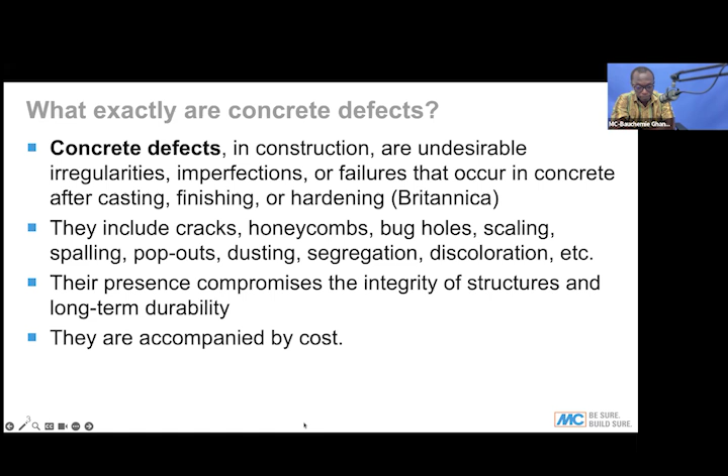Now we move to the common defects. Research has shown that most of the defects we have on our site or project are approximately 36% related to construction and supervision problems, about 26% design problems, and 21% an issue of exposure conditions like temperature, wind, and those kinds of things.

Like the form work for concreting, if the form works are not properly done, if you are casting concrete and it's not properly vibrated, or the mix designs are not properly mixed on site, you end up having too much water and bleeding in the concrete. All these things are defects that will result in other problems when you allow this to happen on site.

So the human resource on site and their capabilities and technical skills are key to construction, whether you achieve good concrete or end up with defects. This is a summary of research conducted around 1997, and this is true from experience. Most of the issues you meet on site are mostly related to supervision problems on site.

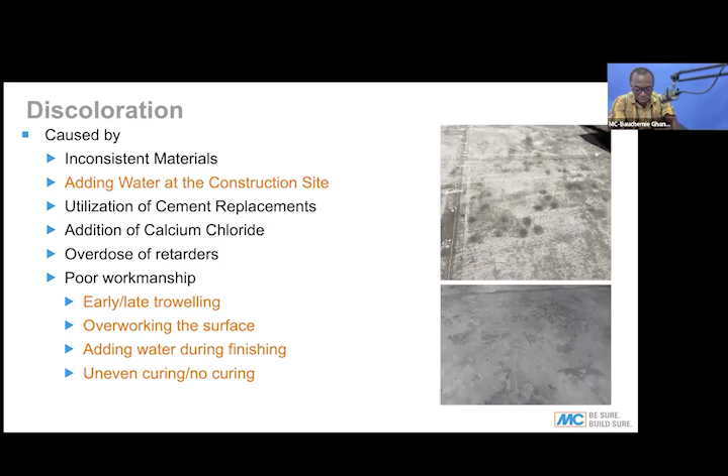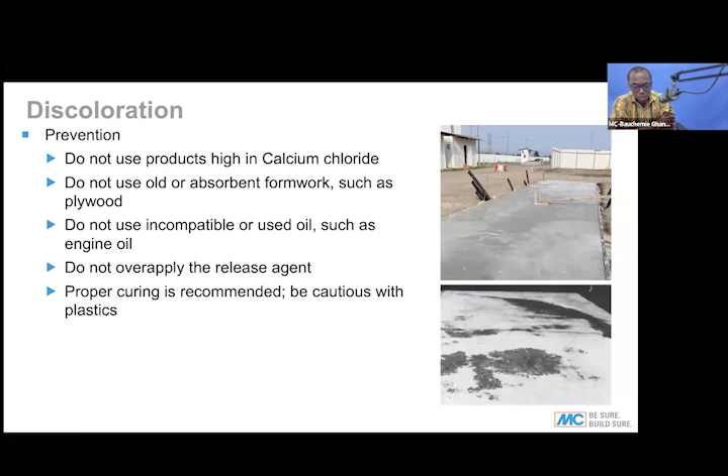Now, how do you prevent discoloring? One of the major issues is to prevent the use of calcium chloride. If you don't have knowledge on how to incorporate it in the mix design, you should desist from using it because it has to be properly controlled in the mix design.

Also, when using formwork with absorbent materials, like the normal wood formworks, not the laminated ones, after casting the concrete you could see it has a different look because the formwork stains the concrete. So if you want very good concrete, the kind of formwork you use is very important. You need to prevent the use of absorbent formwork so it doesn't stain the concrete.

Also, when casting concrete, you have to make sure the mold release agent you use is compatible. Sometimes we end up using dirty oil on project sites, and by the time you take out the form you can see black spots on the surfaces. You have to use a proper mold release agent for such works, and also do not over apply it. If you have too much on the formwork, it ponds at a section of the slab. Once you cast the concrete and it dries, by the time you take off the formwork, that ponded area has so much mold release agent that it stains the concrete.

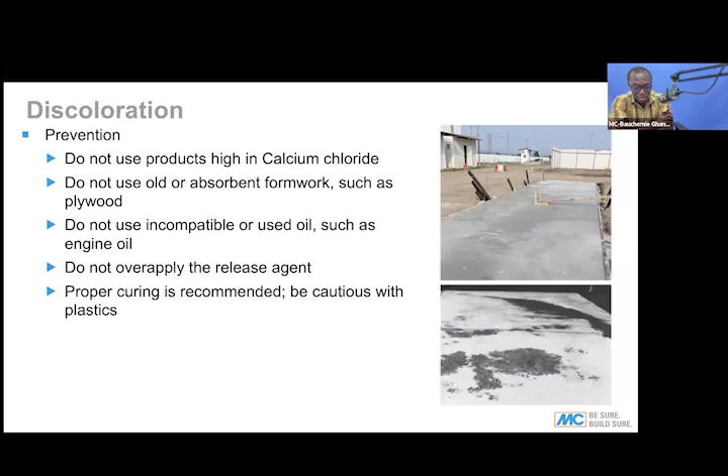So you need to moderately apply it, knowing how to apply it based on consumption. Also, proper curing is very recommended for all your concrete works to ensure the drying process is uniform on all areas, so you don't have any patches or isolated drying on some sections of the concrete.

Now, how do you repair such defects? For discoloring of surfaces, the main way to repair is by cleansing. If you have colors on the surface, you can cleanse the surface and wash it. You can also do acid wash.

If you want to maintain a color, you can do what we call tinting - you tint the concrete or apply a cosmetic material. Cosmetic materials are specially designed to allow the concrete to look similar. So if you have concrete with patches on the surface, you can apply cosmetic fillers to remove the damp patches and offer a uniform look to the entire concrete. These are examples of how to repair such defects.

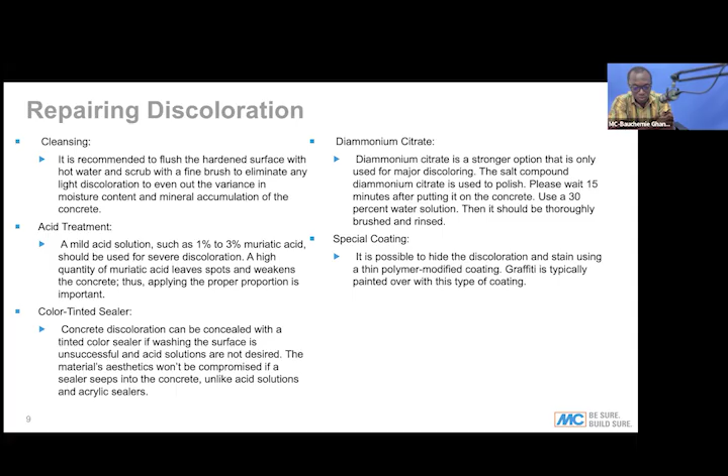Other options are special coatings. If you have a floor with these kinds of patches, you can go for resin coating or a pigmented coating that can offer a very good finishing as well. So these are options you can adopt to repair discoloring on concrete surfaces.

Now, when it comes to cracks, there are different kinds, and they can be grouped into two: non-structural and structural cracks. Non-structural cracks do not affect the serviceability of the structure, so it's more aesthetic - the cracks are there but not affecting the structural performance, however it is not pleasing to look at. Structural cracks are those that have an effect on the structural performance, or serviceability, of the structure.

Now we have plastic shrinkage - we'll look at what plastic shrinkage crack is. We also look at plastic settlement - when you say plastic settlement crack, what does it mean? Thermal cracks, we'll look at what it means. And when it comes to settlement cracks, we also look at what this means.

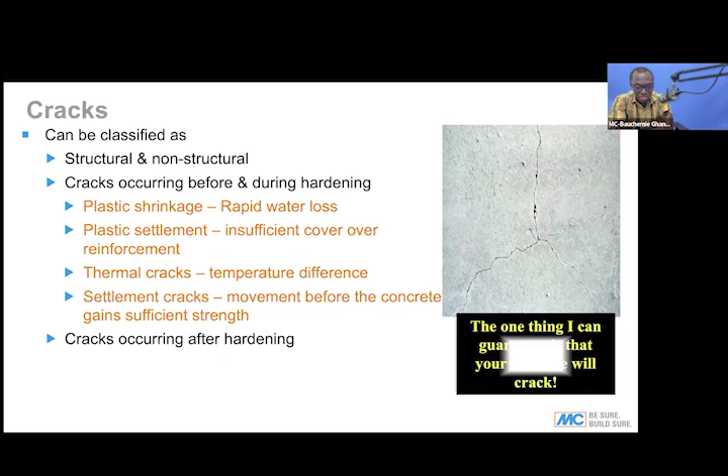Now, when it comes to plastic shrinkage, this happens when you cast concrete and the surface is covered with water or a film of water. This film of water will definitely leave the surface, but the rate at which it leaves must be recharged by water from the concrete itself.

As the water is leaving the surface, water from the concrete must also come up to recharge it. But sometimes the loss of moisture on the surface is more rapid than the rate of recharge from the concrete itself, and that creates a differential between the surface and the concrete.

When this happens, because water loss on the surface is very high, the drying process on the surface becomes faster, so the surface becomes hard. By the time the rest of the concrete begins to set and shrink a little, it causes a pull on the surface that creates some cracks.

This kind of shrinkage, plastic shrinkage cracks, are mostly seen within the first 1 to 6 hours of applying the concrete. As I mentioned, the major cause is the high evaporation rate of water from the surface. So when the water leaves the surface and there's no recharge, you get what is called plastic shrinkage.

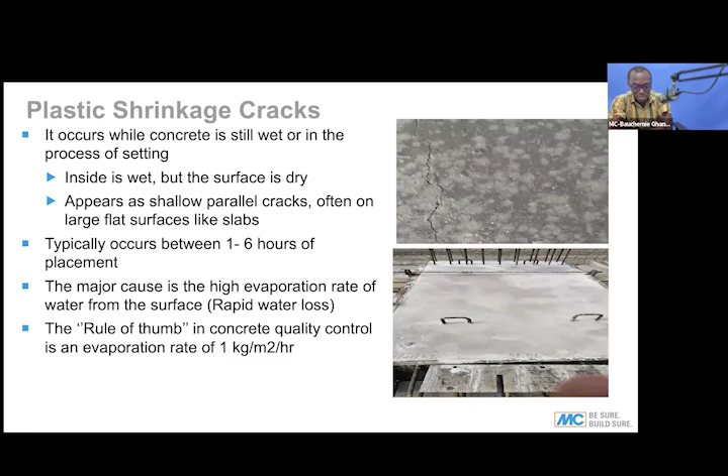Now you can see a typical example of how plastic shrinkage looks. You can see the cracks are straight in a certain pattern, but they are not connected. Once you see a defect like this, it gives you an indication that it's a plastic shrinkage crack.

Now, the environmental conditions that cause this kind of cracking include ambient temperature. When you have a higher temperature, it will definitely result in higher loss of moisture. And when the concrete temperature is so high, when the concrete is hot, you also have a lot of moisture leaving the concrete.

When you have low humidity, especially if you're casting concrete in the dry season, the humidity is very, very low. In that sense, the loss of water from the surface of the concrete will be higher than the rate of recharge, and that differential will cause plastic shrinkage on the surface and subsequent cracking.

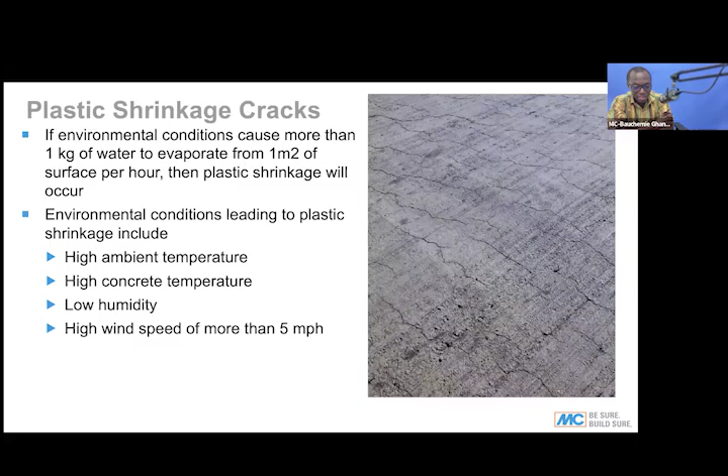Also, when you have high wind, when you are constructing and it's exposed, and the wind speed is more than 5 miles per hour, you definitely get this kind of issue because the moisture loss on the surface will be higher than the rate of recharge of water from the concrete itself.

How do you minimize such defects? If you are constructing and you can see all these things are prone to affect your concrete, how do you minimize these effects?

First and foremost, when you are casting concrete on a subgrade, it has to be made damp. For example, if you are casting an oversite concrete slab on backfill material, because the backfill material is dry, it will absorb moisture from the concrete faster. So the amount of water needed by the concrete to recharge the surface will not be present, and you end up with a lot of shrinkage on the surface.

So the use of a DPM on subgrade materials is very key. If you don't want to use such material, you have to make sure you pre-wet the subgrade, watering the floor so it doesn't have any affinity for water before you put the concrete on it. This way, you ensure you won't have faster moisture loss from the concrete, and the moisture in the concrete can recharge the surface to prevent shrinkage.

You can also prevent this by stopping excess water loss through the use of curing compounds. You can spray material onto the surface to seal it from losing moisture, or recharge the surface by spraying water, which is the normal curing method. In some cases, you spread something like jute on the surface where you put water, so it retains the water for a period of time.

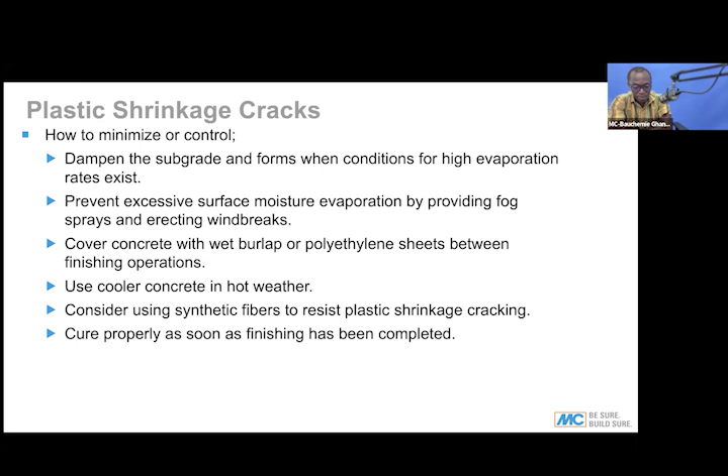Another key thing you must do is make sure that you cure properly, and you must know the time to start the curing. The moment the concrete starts moving from the plastic to the solid state, you have to start curing. When you know you can step on the concrete with your foot without it entering the concrete, that's the time you need to start curing. So once you cast concrete, you need to monitor it. At that transition stage, you need to start your curing, else you end up having a lot of shrinkage cracks on the surfaces, the plastic shrinkage cracks.

How do you repair this kind of cracks? Sometimes you have to open the cracks, because some of these cracks are not deep cracks, they are just surface cracks. So we can just open the surface by cutting into a V shape, then you repair with cementitious materials which have the same strength as the existing concrete.

In some cases, you can use resin materials, you can use an epoxy material. You mix the epoxy with sand, then you use it to seal the crack. All these are ways you can repair these cracks.

And sometimes when you have a lot of cracks on the surface, like in the picture I showed, you may have to remove the cover on the surface and probably recast it. You have to remove the cover and recast the surface to restore that, because when you have reinforcement closer to the surface and you have such cracks, exposure conditions like carbonation or chloride attacks are very common. So water and dissolved salts will enter these cracks, then they have access to the reinforcement and they begin to react.

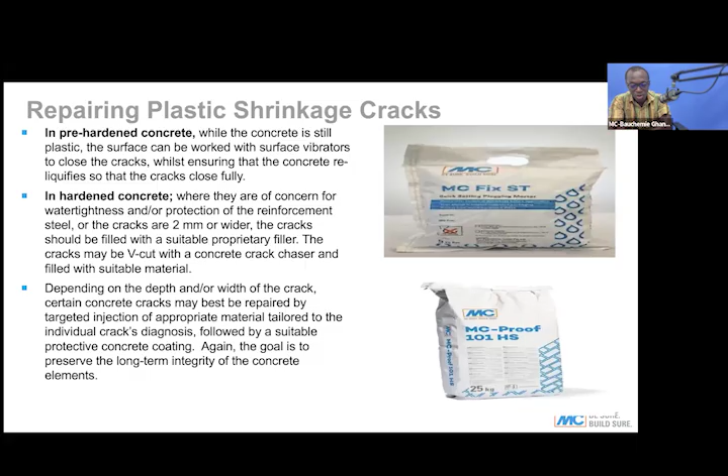Then corrosion sets in, and the reinforcement begins to lose its potency. So once you notice that these cracks are a lot on the surface, you can just remove the surface concrete, take off all the cracks, and replace it with concrete or a structural repair mortar to restore the integrity of the structure.

Another kind of crack that we mostly see is plastic settlement. Now, one key thing you can use to identify plastic settlement is that they are always in the direction of the reinforcement. So how does this happen?

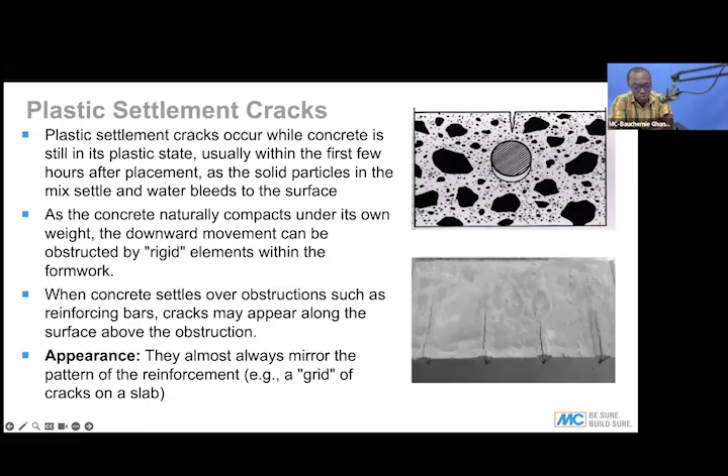When you have concrete moving from the liquid to the solid state, it undergoes self-compaction. Now, when it's undergoing self-compaction and the concrete is rearranging itself, sometimes the reinforcement serves as a blockage to the downward movement of the concrete. So you can see that the concrete will sit, but right under the reinforcement there will not be any concrete at that section. Then the top of it will begin to crack because of tension introduced on the surfaces.

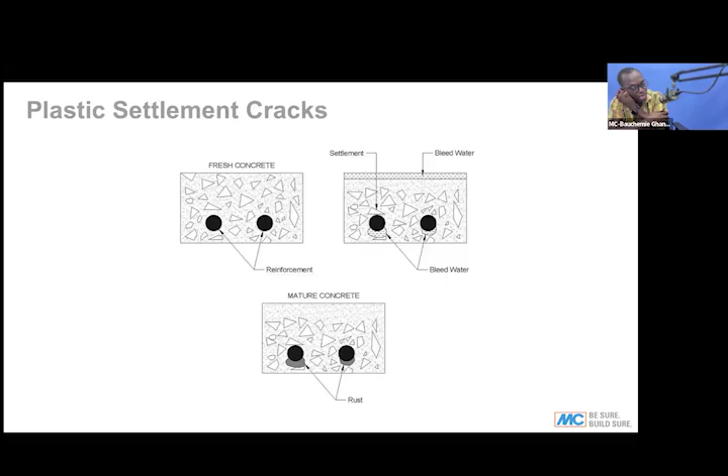So you can see from the illustration, the reinforcement in fresh concrete. When the concrete is settling, you can see the aggregate moving down, that is where the concrete is undergoing self-compaction. Now, because you have the reinforcement in position, the aggregates will be stopped or blocked by the reinforcement, so the compaction results in only slurries going underneath the reinforcement. Over time, this slurry or water that goes under the reinforcement will dry out, and then you have these cracks happening.

So you can see on the surfaces, this is a typical example. We can see the rebar positions, and there are cracks along the rebar position, reinforcement position. So these are plastic settlement cracks, and it mostly happens when you have heavy reinforcement and don't properly compact it by vibration.

Also, when you end up having so much water in your concrete, the concrete will begin to sit on its own, to compact on its own. Then the reinforcement will serve as blockades to the aggregates, and you have the shrinkages happening. In the event where the reinforcement is closer to the surface, the concrete cover is subjected to tensile stresses that cause cracks. So that is when you see that the cracks are along the reinforcement.

So that is the major cause for plastic settlement. Now, as you can see with reinforcement bars, the concrete hangs up at the top layer of the rebar, while the surrounding concrete continues to sink, creating a tear directly above it.

Sometimes the compaction done on the fill material is also not adequate. So once you put the concrete, especially a very thick concrete with heavy weight on the base material, it compacts the earth. Once the earth is compacting, that causes a downward movement of the concrete. All these things can lead to cracks on the surfaces.

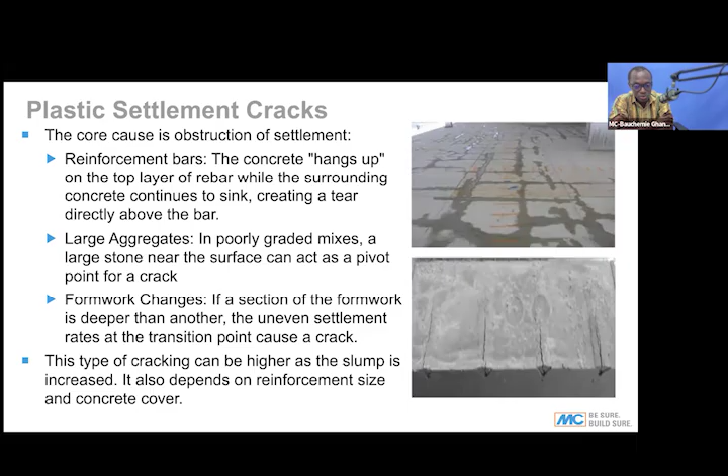So how do you repair such cracks? Now, one of the ways you can solve that is by means of injection. Simply because if you have a crack that is under a reinforcement, it's very difficult to go behind the reinforcement and repair it. So what you can do is drill to intercept those cracks and inject a resin material that can seal the crack.

So use a low viscosity material. Why low viscosity? Some of the cracks are very tiny, and if you have a high viscosity material, getting it through the crack is nearly impossible unless using high pressure. But because the surface of the crack is open, high pressure may cause the resin material to seep out. So you need a low viscosity material to be able to seep through all the cracks.

In some cases, you can do gravity injection by just pouring the material into the crack, and that will fill the crack. So that's another option. Depending on the depth, you can go for the injection or the gravity injection by just pouring the resin on the surface to seep through the crack. So these are options you can adapt.

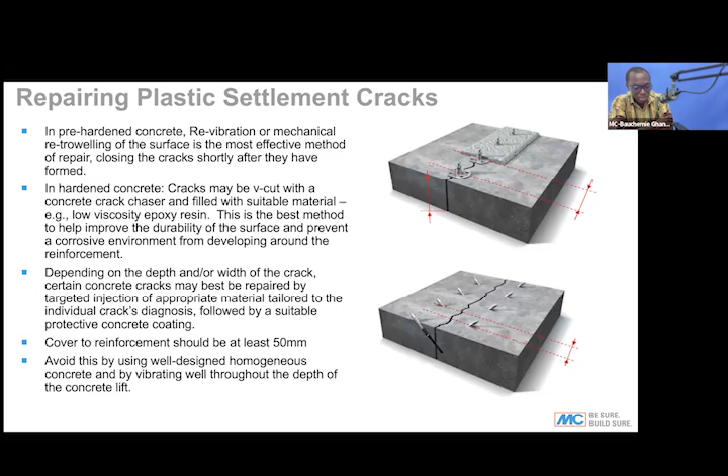Now, in the event where you can remove the concrete and redo the surface, it's also advisable. You can do that to repair the concrete. The reason you need to do this is the concrete cover serves as a protection for the reinforcement. Once this is compromised or there are cracks in it, you're allowing the reinforcement to be exposed to external conditions that may affect its durability. So that needs to be protected.

Another aspect is thermal cracks. There are two types of thermal cracks I want to talk about: one that happens during the hardening process of concrete, and another thermal impact that happens after the concrete is hardened. Thermal cracks mostly happen when you have differential temperatures.

We all know that cement undergoing hydration generates heat. This heat generation causes an expansion of the concrete mass. However, when the ambient temperature is lower, that differential temperature will cause a lot of cracks because the exterior of the concrete will be cold and undergo shrinkage, while the inner part of the concrete will be hot and undergo expansion. So that pull of the inner core on the hardened surface, which is cold, will cause that crack.

That differential temperature will cause that crack on the surfaces. So that pull and push between the surface and the core of the concrete is what leads to the thermal cracks on the surfaces during the setting period of the concrete.

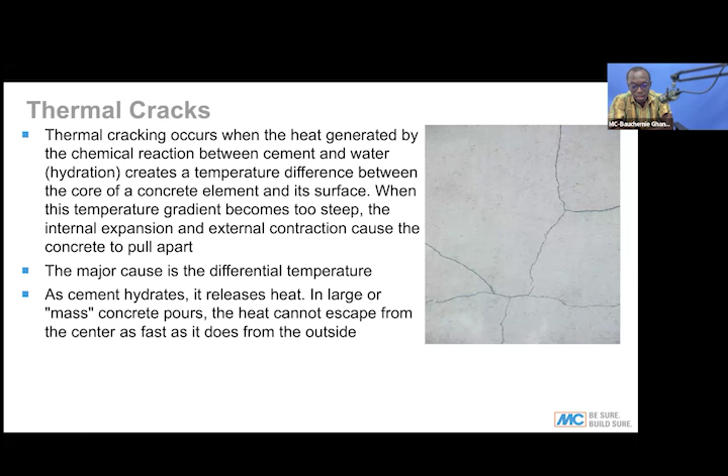So as I explained, the surface of the concrete could be exposed to a lower temperature, whilst the inner core of the concrete will be undergoing a lot of heat because of the heat of hydration. The core will begin to expand because every material, when exposed to heat, undergoes expansion. Then the expansion will cause a pull on the surface, which is already cold, and that will cause some cracks on the surfaces.

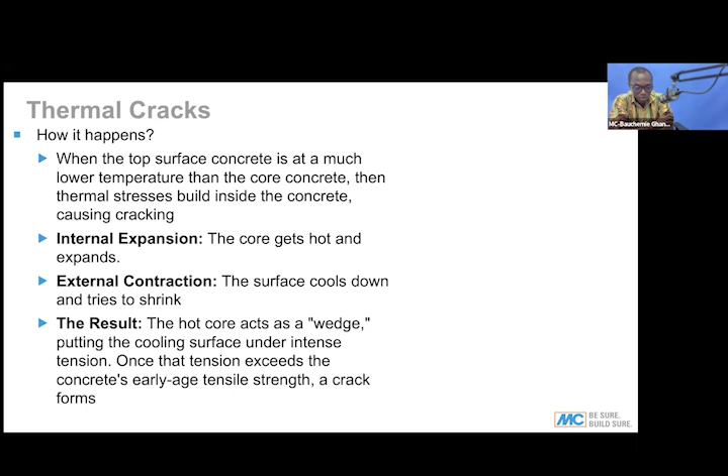And when you have a lot of wind outside or the ambient temperature is very cold, the surface also ends up cold. Most of the time people think casting concrete at night is good, and yes, it is good. But casting concrete at night without putting necessary measures to cool the inner core can also cause cracks on the concrete surface, because at night the ambient temperature is lower, but the concrete core could have a lot of heat. This differential heat may end up causing cracks on the surfaces. So you should know how to balance the inner core heat and reduce the steepness of the temperature gradient between the inner core and the outer concrete.

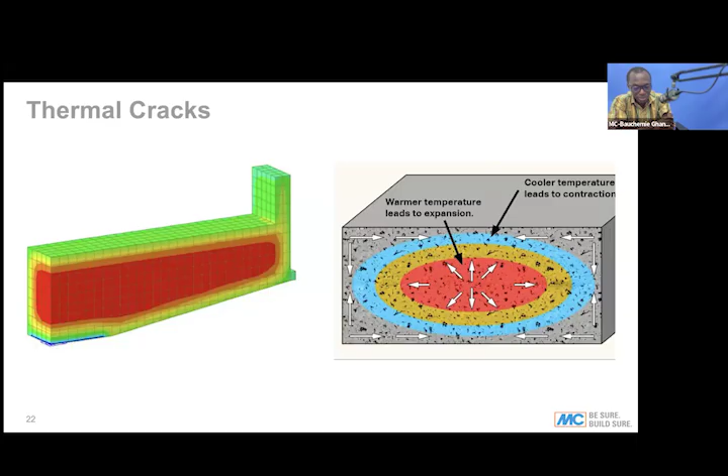So how do you minimize this kind of cracks?

These thermal cracks can be reduced by controlling the heat of hydration. Now, cement, when it reacts with water, it undergoes what you call the heat of hydration. That's when the solidification process begins, and this process ends up generating a lot of heat.

So if you want to reduce the heat, what you can do is also put in some cement replacement materials, like pozzolans, fly ash, GGBS. This can also be introduced in the concrete. When you do this cement replacement, you are reducing the quantity of cement, and in that sense, reducing the amount of heat that could be generated. So introducing these materials, pozzolans and fly ash, can also help reduce that.

Secondly, in some cases, you may even have to use cold water for the concrete, and that can also regulate the inner core temperature. In some cases, like Dubai, most constructions install pipes in the concrete where they run cold water through them. So as they cast the concrete, pipes are installed, and then as the concrete is hardening, they run cold water through the pipes, which helps control the temperature of the concrete.

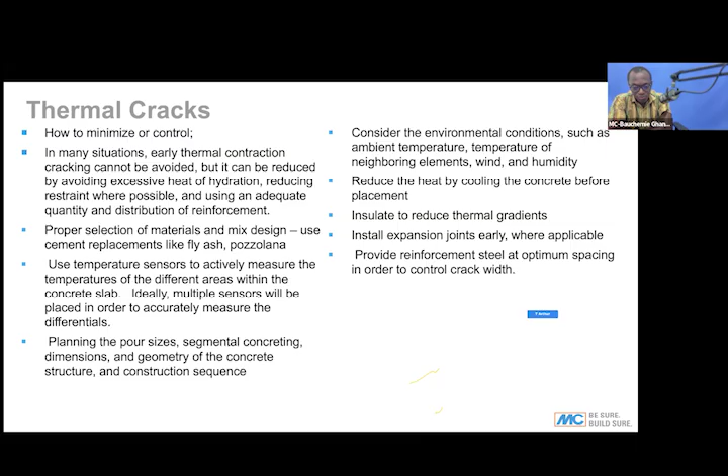So that talks about the thermal crack when the concrete is moving from the plastic to the solid state. Now, another form of thermal crack is when the concrete has already undergone the setting, it's been there for a longer time, but it's exposed to heat. This is also another form of thermal crack that may happen to the concrete, and these are because of the cyclic heating and cooling of the concrete.

We all know that concrete is very weak in tension and strong in compression. Now, when you have concrete exposed to a lot of heat, it will definitely expand. When it expands and the evening time is cooling, it has to coil back. In the process of coiling back, the concrete will be in tension because it's trying to pull the units from each other to come back to the original state. Then that presents the concrete under tension, and this tensile stress in the concrete ends up causing a lot of cracks.

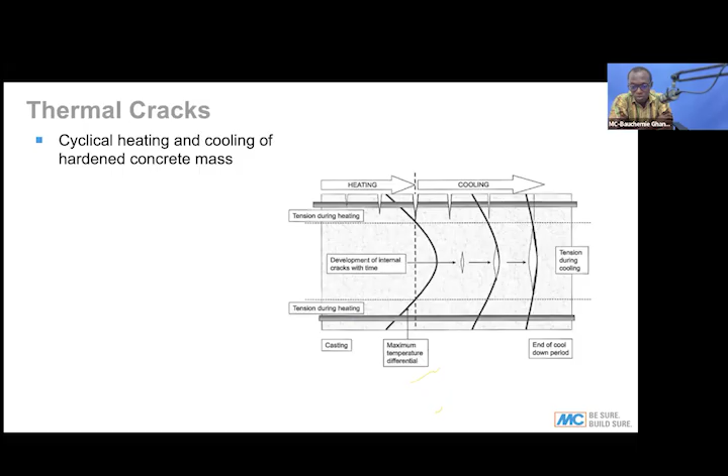That's why we sometimes advise that you can use PP fibers or synthetic fibers in the concrete, so that it allows such movement without the cause of cracks in the concrete mass.

How do you repair such cracks? Now, thermal cracks could be deep cracks because of the heat generated. So the best option to repair thermal cracks is injection, because if you're injecting, you have to make sure the whole crack is injected.

How do you know you've injected the whole crack? Before you do the crack injection, you can do the UPV test to understand the depth of the crack. Once you establish the depth of the crack, you know where to intercept the cracks before you go on with the injection material.

If these cracks are not deep, just superficial cracks on the surface, then you can do a V cut on the surface. You open the crack wider on the surface, then you can seal it with some resin materials or a structural repair mortar to patch the surfaces and seal them. The objective of this is to improve durability. Some of these cracks may not affect the structural performance of the element.

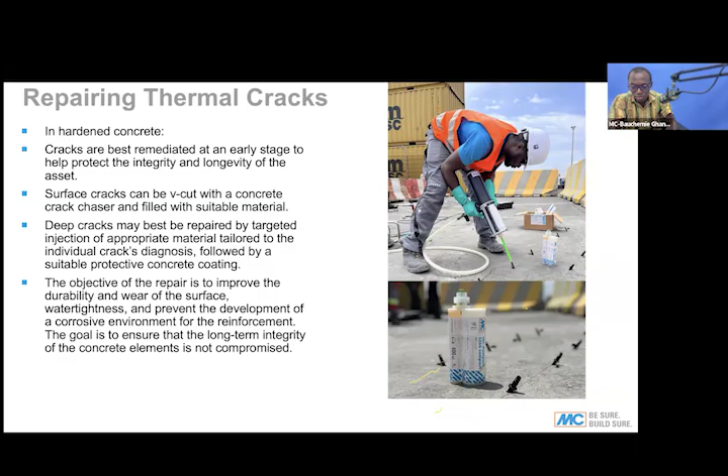This has a durability concern because water can seep through the crack, and this water may carry dissolved salt that will affect the reinforcement. In the presence of sulfate, that will affect the cement paste in the concrete. In the presence of chloride, that will attack the reinforcement. So it's necessary that once you have cracks in your structure, you make sure you do an injection or properly seal the crack to prevent these exposure conditions from affecting your structure.

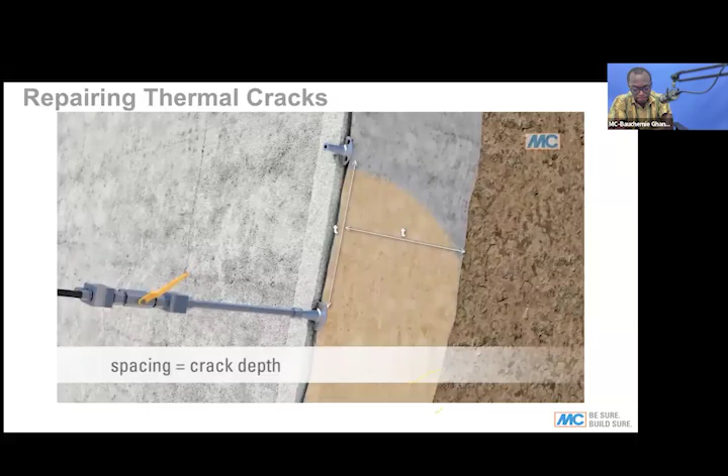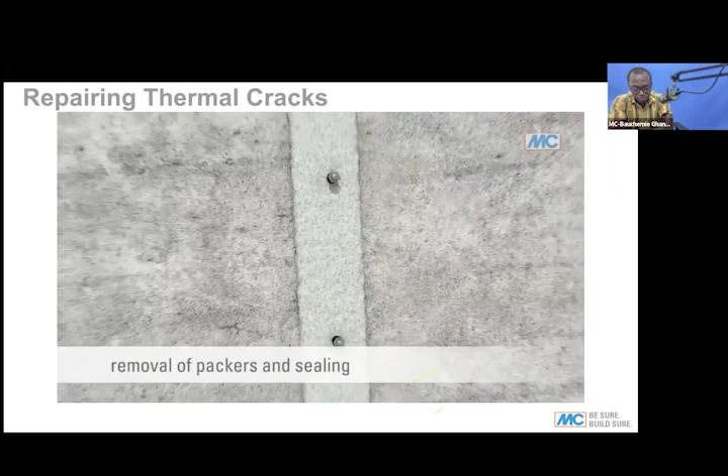So that summarizes the injection process for the repair of deep cracks.

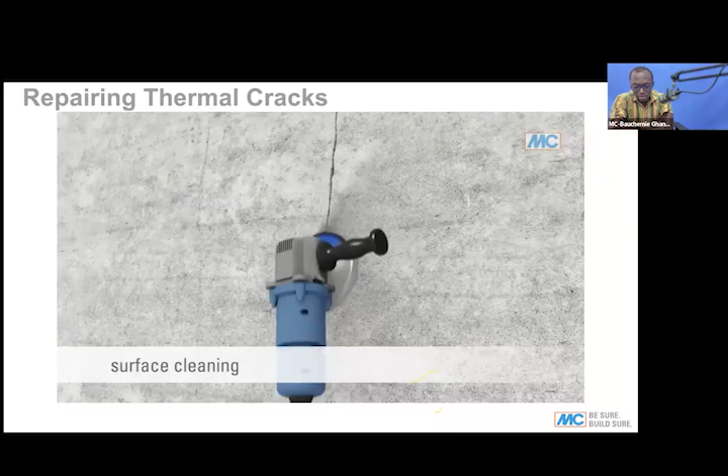Now, when you have a dynamic crack, these are cracks where after repair there's a possibility of the cracks happening again. We call it a dynamic crack, meaning no matter what you do, the cracks keep opening. With such cracks, if you do rigid sealing or injection with a rigid material, the possibility of the crack happening again is very high. So how do you prevent that?

We can also go with what is called stitching. The stitching of the crack can be done with carbon fiber. You cut across the crack, then insert a carbon fiber material into the crack with an adhesive. That restrains the concrete from moving along that plane. So that can be done to stitch it.

In some cases, if the crack is not a serviceability concern but just a durability concern, you can do a flexible injection. This means sealing the crack with a material that is flexible, which will not allow water to ingress. So it has a durability property—it can protect the structure, the concrete, or the reinforcement from the impact of chlorides or sulfate attacks. So that can also be done.

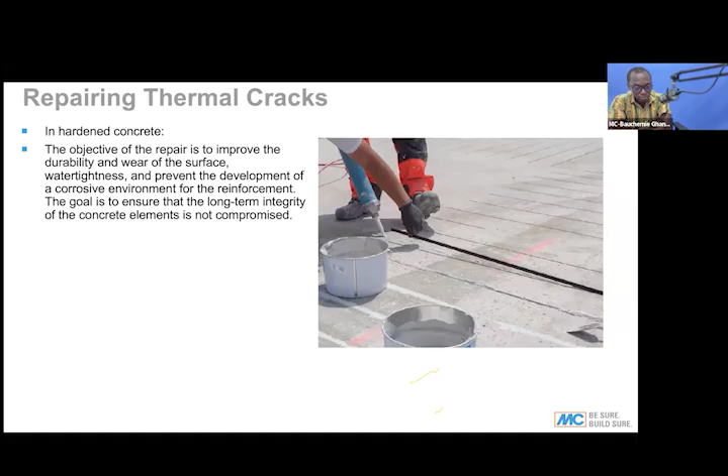But where the crack is dynamic and you want to prevent the movement and reoccurrence of the crack, then in addition to the crack injection, you may have to stitch the crack as well with carbon fiber across the crack, so that it restrains and prevents further movement and development of that crack after stitching. That can also be done to prevent future occurrences.

Now, dusting is sometimes when you cast the concrete and it dries, and you pass your hand on the surface, you see a lot of dust coming from the surface. The main cause of this is sometimes you have less cement in your mix design. Secondly, you may end up having a lot of slurries—when you have so much water in your concrete and it dries, it pushes slurries to the surface, which is cement paste without aggregates. This cement paste on the surface, called cement laitance, ends up rendering the surface very dusty. So when you pass your hand on it, it begins to form dust.

For industrial floors with a lot of forklift traffic, you could see that the floor is always dusting, and eventually the aggregates become exposed, simply because the paste material or fine particles—the cement plus sand—are worn out under the mechanical load.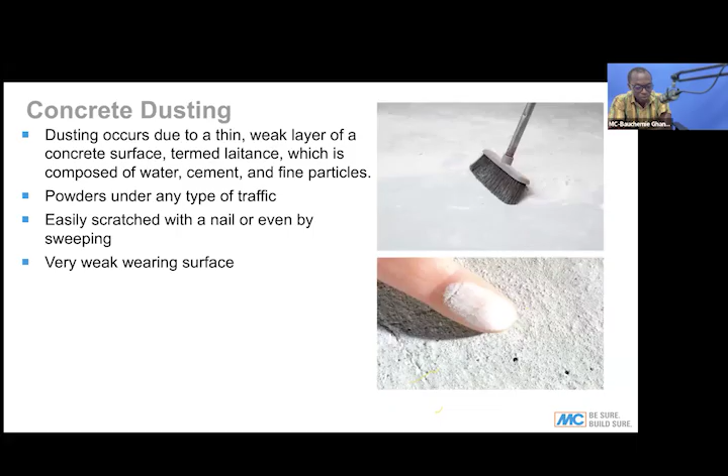So once you have less cement in your concrete, which is the binding element, you have this kind of issue. Once you have so much water in your concrete, you also end up having a lot of dusting on the surface. As I mentioned, when you have low cement content, you end up having dust on the surface because the binding element is less, leading to a lot of fine materials on the surface.

Adding excessive water and also placing a non-absorbent subgrade or polyethylene vapor barrier—when you are using a DPM and you have so much water in your concrete, you definitely get a lot of slurries coming to the surface because the subgrade will not absorb any moisture from it. So you should know what you are offering and know the kind of mix design you need to do. When you have so much water, slurries come to the surface, and the drying process ends up leaving cement residue on the surface.

You have that dusting on the surface. Sometimes this happens when you have rapid drying, because hydration takes time. When the surface dries faster and there's no available moisture to allow for continual hydration of the cement particles, you get a lot of unhydrated cement on the surface. Cement has to be hydrated to offer that matrix to bond the surfaces. So once the cement is unhydrated, you get this kind of dust because there was faster drying and not enough water for hydration. That can cause a lot of dust on the surface.

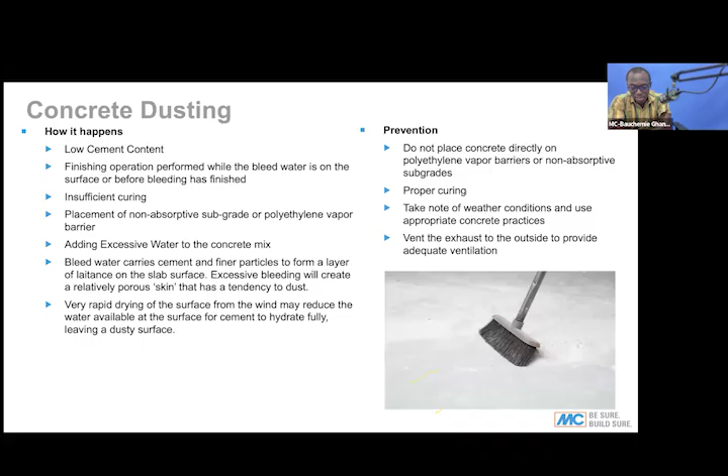How do you prevent that? One, you need to do proper curing so that there's no faster drying on the surfaces. You also need to take note of the weather conditions. If the weather is hot, you have to know when to go ahead with your concrete casting to be sure it doesn't have any effect on the surfaces.

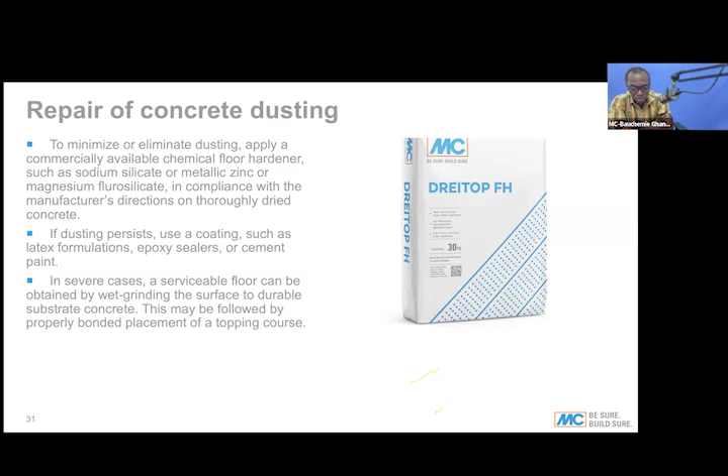Now, how do you prevent that? Once you cast the concrete, you can introduce what we call a surface hardener, to serve as additional protection and additional strength on the surface. While the concrete is still fresh in the plastic stage, you strew in the surface hardener, then float it, whether manual or power floating, to achieve that hardness on the surface. With that hardness, you're sure there's not going to be any dusting under loading, forklift and vehicular loading.

Another way is to introduce what they call resin coating. Once you have surface dusting, you can prepare the surface very well and introduce a resin coating, a pigmented coating that serves as an anti-dust solution and also gives a very good finishing. Sometimes you can also do a self-leveling screed on the surface, after power washing, applying a self-leveling material that has good strength like the existing concrete, to give the same performance. These are options that are available.

You can recast a self-leveling material as low as 10mm or 12mm thickness on the entire surface. Where you want a pigmented coating, you can go with an epoxy finish or those kinds of coatings to give a very good finish. So that's what you can do to repair a dusting surface.

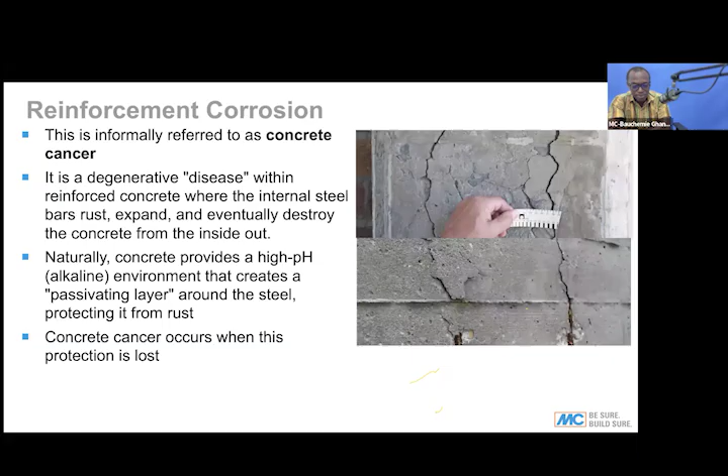Now, reinforcement corrosion. As I mentioned, reinforced concrete is a composite material, and the performance of the concrete depends on the reinforcement, and the performance of the reinforcement also depends on the concrete. When you cast concrete, in its first state it's basic, the pH is around 13 to 14, but some external factors like carbonation can lower the pH of the concrete. When this process happens, the concrete becomes acidic, and this acidity breaks down the protection around the reinforcement, causing the onset of corrosion due to carbonation. Once reinforcement in concrete undergoes corrosion, it undergoes expansion because of the corrosion, and this expansion causes the concrete to start breaking off, as you can see in the picture.

So these are typical examples of reinforcement corrosion. One is the carbonation process, which I've explained. Carbon dioxide enters the concrete with air, and once there's moisture present, it becomes acidic. The pH of the concrete begins to drop from basic to acidic. When this transition happens, it breaks down the protection around the reinforcement, causing the onset of corrosion.

Now, there are also chloride attacks. These are mostly in areas where we have dissolved salt in water, which passes through the concrete by capillary action. These chlorides attack the reinforcement and begin to eat it up, reducing it in size. That's what affects the reinforcement. Once the reinforcement is affected, the composite performance of the structure is compromised, because the reinforcement takes care of the tensile stresses present in the concrete. Once the sizes are reduced, that performance is also compromised.

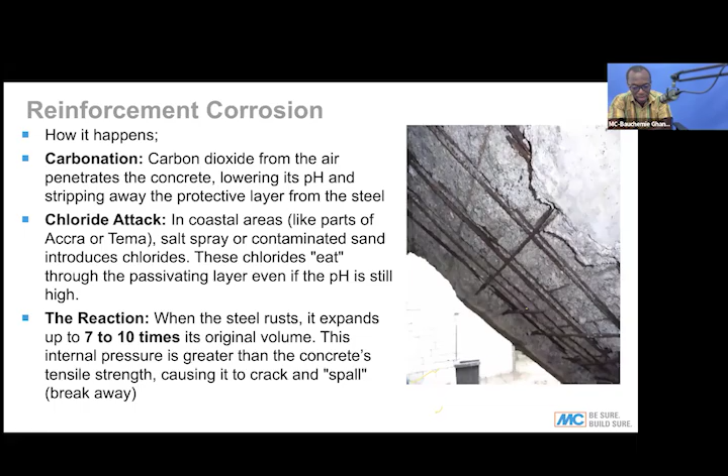So this explains the process of carbonation. Before the reinforcement is exposed to external factors and exposure conditions, once alkalinity begins to drop, the reinforcement begins to expand. Because concrete is weak in tension, the reinforcement expansion exerts pressure on the concrete that begins to pull it off. Then we have what you call spalling concrete, where the concrete begins to spall and breaks off.

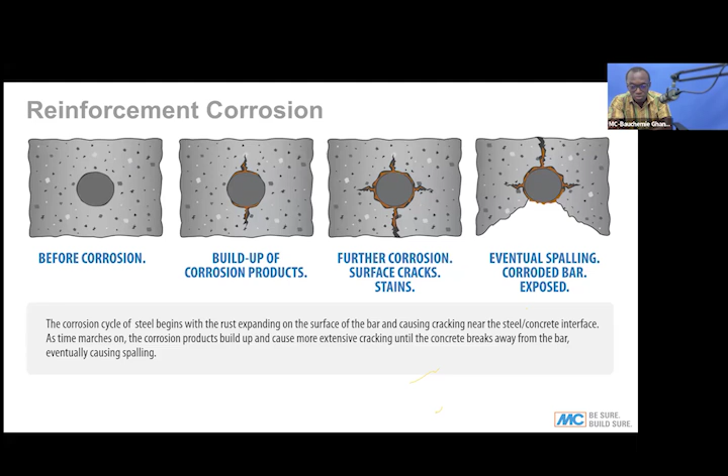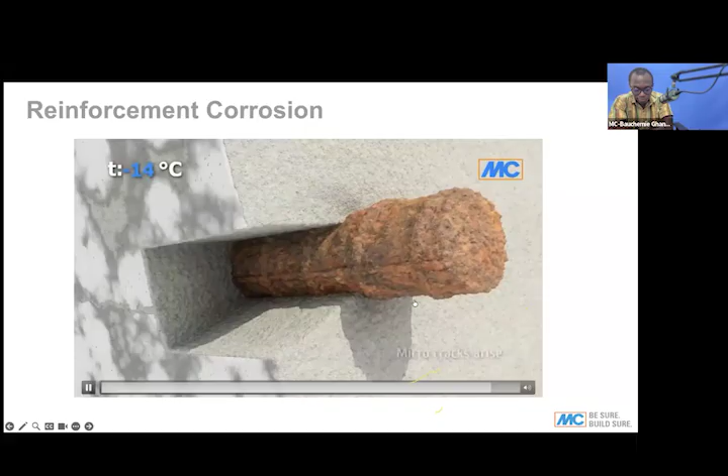All right, so that summarizes the corrosion process induced by carbonation. From the introduction of moisture and carbon dioxide causing the concrete to be acidic, that breaks the protection of the reinforcement, then that causes the onset of corrosion and expansion, and then the concrete begins to fall off.

So how do you prevent such things from happening? We need to make sure that the concrete is not permeable, or at least the permeability is as low as possible. This can be achieved by doing a very good mix design with a low water cement ratio. But in doing so, the workability is compromised. That's when you need to introduce plasticizers to compensate for that. So with the low water cement ratio, you add plasticizers to get the workability and make sure you have a low water cement ratio. Then you have a very watertight concrete.

You can also use other products like corrosion inhibitors. Corrosion inhibitors are materials you can add into your concrete as a replacement. Once you have this done, the pores are blocked, and this also serves as additional protection around the reinforcement. It forms a film around the reinforcement that does not allow access by carbonated instances to affect the reinforcement.

Another aspect is to increase the concrete cover. Once you have a thicker concrete cover, even if it's exposed to carbonation, it takes a longer time for the acidity to reach the reinforcement, so it stays protected for longer. For exposure conditions like construction closer to the sea, or in an environment with a lot of dissolved salt in the ground, we always advise that the typical concrete cover should not be less than 40 mm. The higher you go, the better, because it will take a longer time for the reinforcement to be affected due to the thicker concrete cover.

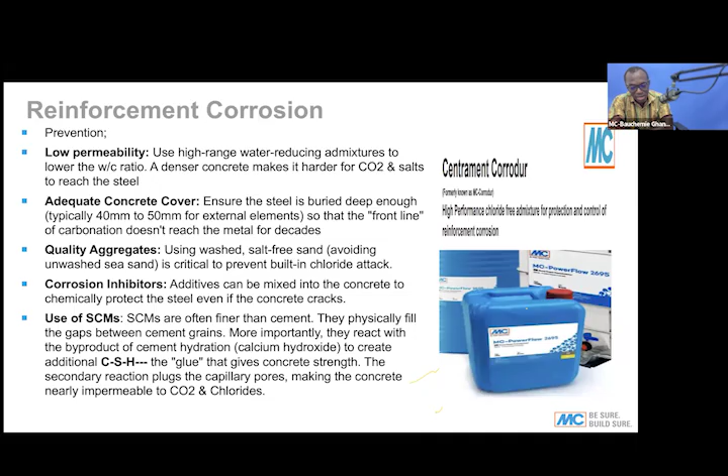Another aspect is to protect the concrete. After the concrete has dried or set, you can put some protection materials on the surface - we call it surface protection. Surface protection materials prevent the ingress of external factors into the concrete that would cause a change in its acidity. Some of these are waterproofing products, and some are special materials that impregnate the surface of the concrete and make it watertight. So once external factors come in, these materials prevent them from affecting the reinforcement.

Some of the repair processes - how do you repair such defects? First and foremost, you need to make sure you expose all the reinforcement. Once it has undergone corrosion, you have to expose it, because if you don't expose it and just do surface repairs, the corrosion will continue and expand at other sections, and you end up having the defects happening again.

Once you've exposed the reinforcement, we need to check whether the sizes have reduced or are still the same. If the sizes have reduced, there has to be a replacement, because in design you look at the area of reinforcement in a particular element, and once the sizes are reduced, the areas are also compromised, so there has to be a replacement. You also have to make sure you derust all the reinforcement and protect it from further corroding.

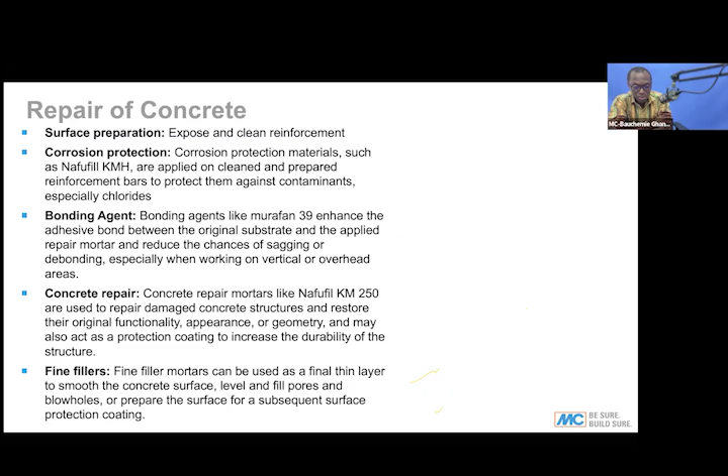These steps summarize the concrete repair process. First, you expose the reinforcement and make sure it is completely exposed. Once you've done that, you protect it from further corrosion by applying corrosion protection material. Then you can go ahead and do the concrete replacement with either a concrete repair mortar, or cast another concrete in place. When you cast this concrete in place, you can also do a fine filler on the surface, or do surface protection that will prevent further ingress or deterioration.

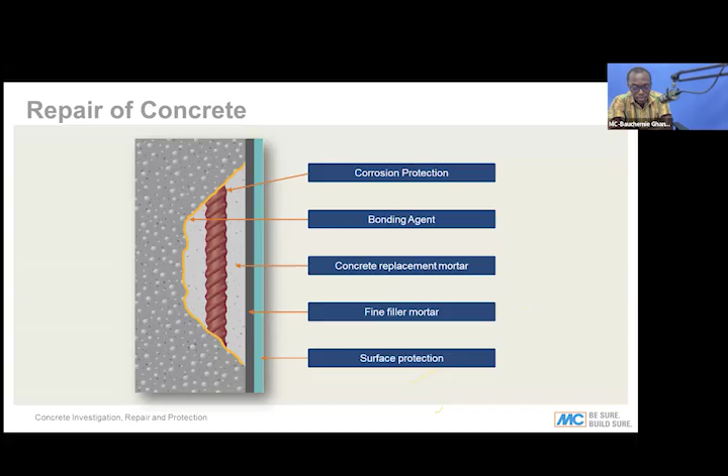Now there's a video that summarizes the processes that I want to show all of us so that we can appreciate the concrete repair process.

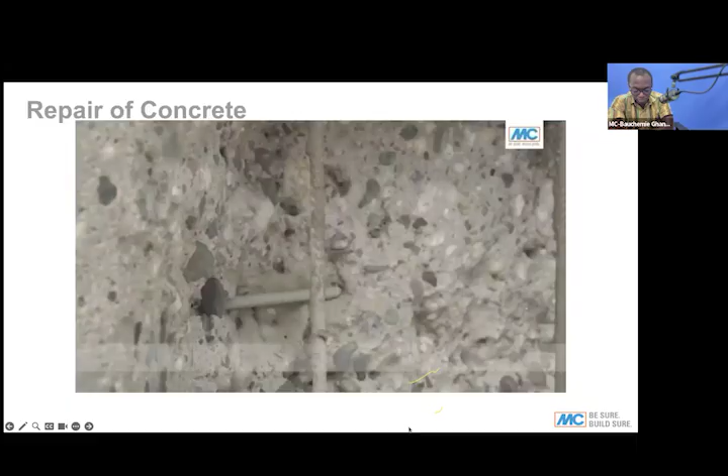Sorry, let me just go back to...

So in conclusion, we all understand that concrete has to be well cast, and to be able to cast it well, it needs proper workmanship, and also quality of materials and supervision. We also need to understand the environment under which you are going to cast the concrete, the temperature variations.

We also need to have an idea that when you are casting thicker concrete, there's going to be heat variation between the surface and the core of the concrete, which can lead to a lot of cracks.

Some of the repair methods we mentioned are the injection methods with PU materials. We can also do stitching of cracks, and flexible sealings. To prevent certain things from happening, you can also go with protection materials to protect the concrete from these exposure conditions.

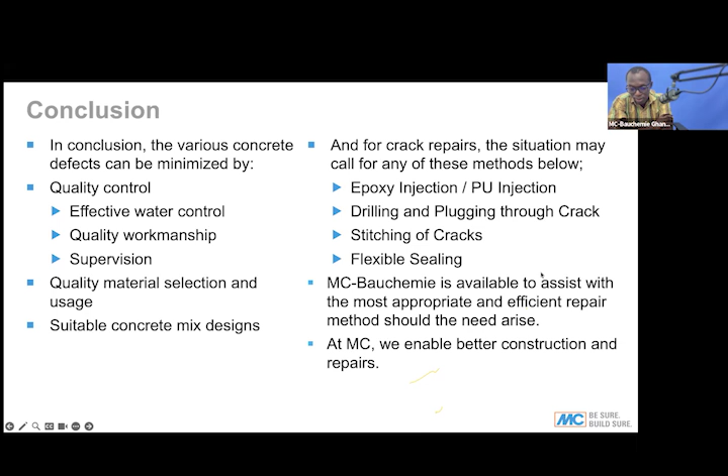Have you heard of tremie concrete before, how to pour tremie concrete? If the reinforcement is not packed, you can put a pipe through it and do a chute at the top so you pour the concrete through it. Tremie concrete is like casting the concrete from the base — you allow the concrete to pour from the base and come up. That's how you cast mostly, like piles — you cast from the bottom. If you cast from the top, there's going to be segregation. So you put in some chutes or pipes, and as you are casting, you raise the pipe so the concrete fills from the bottom. Yes, that can be done.